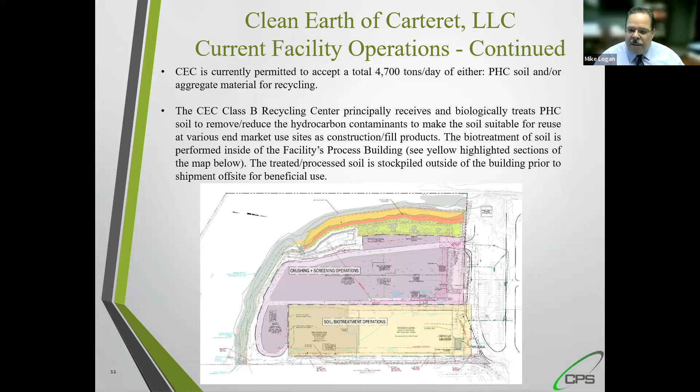So CEC is currently permitted to accept up to a total of 4,700 tons a day of either petroleum contaminated soils, petroleum hydrocarbon contaminated soils, and/or aggregate materials for recycling. It also has a capacity of a weekly average of 28,000 tons per week.

The CEC Class B recycling facility principally receives and biologically treats petroleum hydrocarbon contaminated soil to remove and reduce the hydrocarbon contaminants to make the soil suitable for reuse at various end market sites as construction or fill products. The biotreatment of soil is performed inside the facility's process building, as shown in the yellow shaded section below. Treated and processed soils are also stockpiled just outside of the building to the rear prior to shipment off-site for beneficial use. Next slide.

CEC also receives, stores, processes, and transfers various aggregate materials, including brick, block, concrete, stone, rock, and asphalt from a variety of sources in the portions of the site highlighted below in purple. These are operated exterior to the building and are outdoor processing areas that we'll talk about during the presentation of the application. The aggregate materials accepted by CEC are screened, sorted, resized, and crushed to produce construction materials and structural fill products that are returned to the marketplace. Next slide, please.

CEC's process building is a fully enclosed 80,000 square foot structure that contains a concrete floor and open framed steel structure. It has segregated bays for batch processing and tracking to ensure that we understand exactly what the soils are that are coming in. They can make the matrix meet the specific end use requirements based on various characteristics of the soil material itself, as well as the contaminant levels in the soils.

The use of air curtains on the building's vehicle entry-exit doors ensures that emissions from the storage and processing of PHC soils are vented and controlled by the building's air pollution control system.

Depicted below, the soils are run through the building, so they have a main storage area and receiving for unloading materials. Then they're eventually moved through the building in more or less a circular process to allow us to treat the soils, add the nutrient mixtures, and then once the soils are tested to meet an end use requirement, they can be moved to the outdoor storage area. Next slide, please.

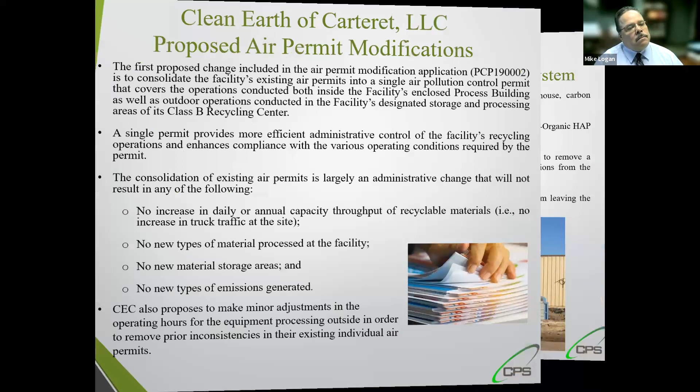Again, as we had indicated above, the first proposed change included in the air permit modification application is to consolidate the facility's existing air permits into a single air pollution control permit that covers the operations conducted inside the facility's process building through the biological treatment process and air pollution control system, as well as the outdoor operations conducted in the facility's designated storage and processing areas of the Class B Recycling Center.

A single permit will provide efficient administrative control of the facility's recycling operations and also enhances compliance with the various operating conditions required under the permit. The consolidation of the air permits is largely an administrative change, initially prompted through discussions with the New Jersey DEP as well as Clean Earth of Carteret.

And the changes do not result in any increase in the daily or annual throughput capacity of the recyclable materials handled at the facility. Results in no increase in truck traffic at the site. Results in no new types of materials being processed at the facility. And there's no new material storage areas or new types of emissions generated at the site. Everything's essentially going to remain as is under the existing permits, just administratively handled in a more efficient manner.